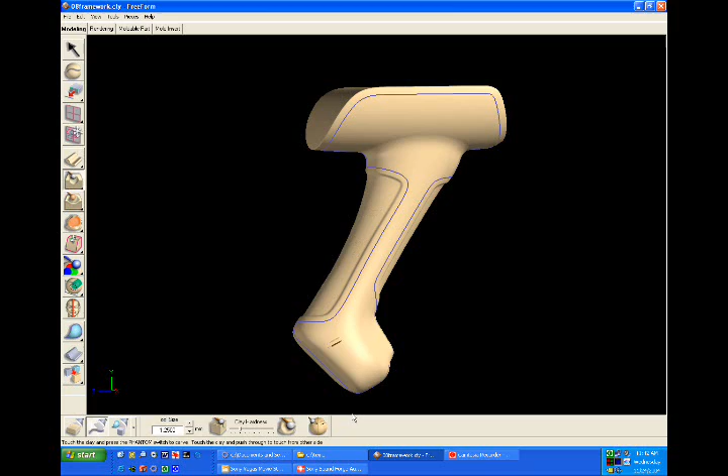Now once I've created my handle composite, in other words the blended handle into the converted clay area, I want to create this curve framework that's going to be the boundary for my patches or my surfaces that I'm going to lay over and fit to the clay. So you can see I've got an edge at the top, I've got boundaries down around these areas. These areas will become textured polygon areas. And then you can see there's a center line on the model that runs around the entire piece.

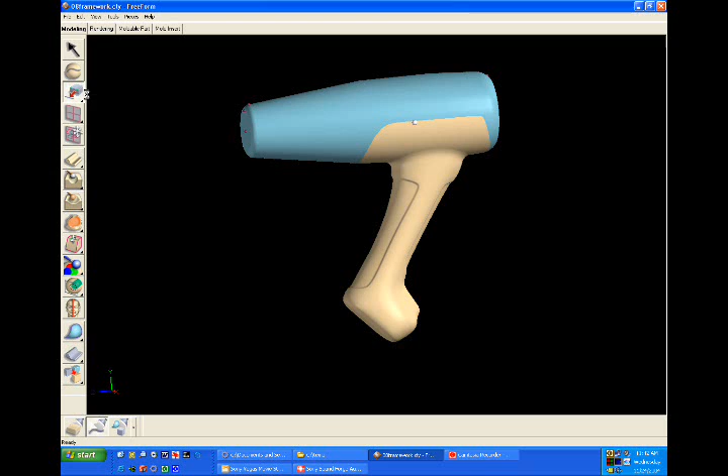So to be able to quickly create these, what I did is, let me delete these. I used my original sheet body, and I did copy edge. I just selected this edge here, copied it. That gave me that edge around there. I also used the intersection on the mirror plane to create the center line around the body, which gave me the center line.

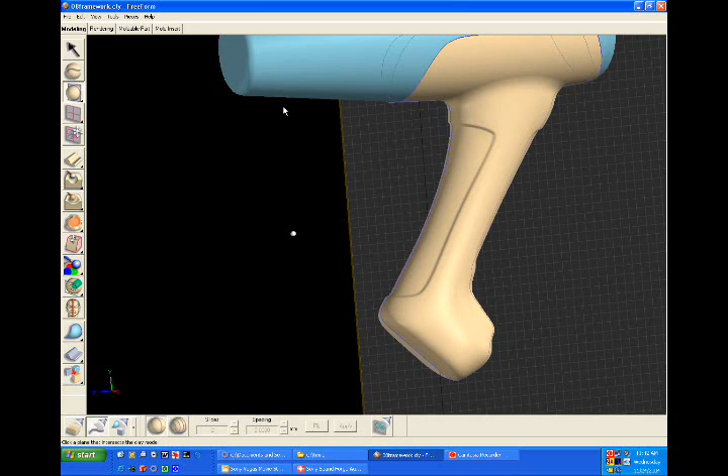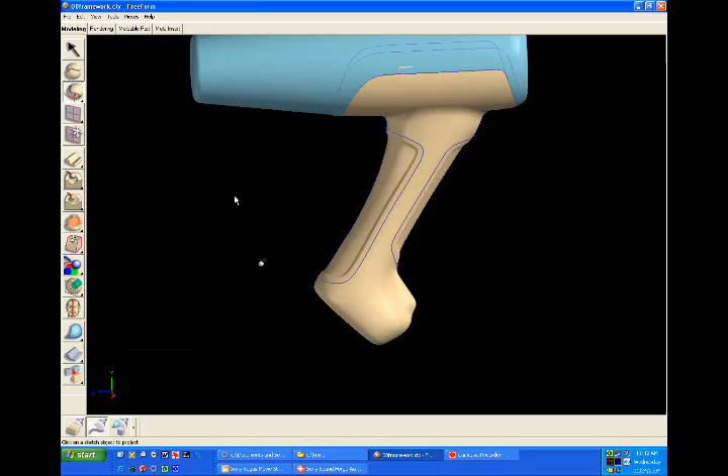And then for these handle cutouts, the areas on the handle, I used the same plane that I had used originally to do the actual cutouts. I went and got the curves, and using the sketch tools, I took the curves that I used to cut them out and offset them out as a way to create curves I could project on the surface to be the boundaries of the handles. So I laid my curves out like that, and then I cut and edited the curves together.

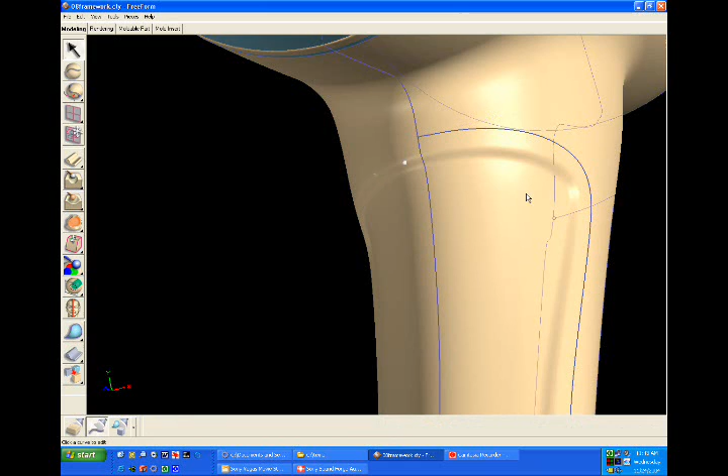I aligned this curve here, and this is important. I just touched that to the center line. Pick the tangent handle. Notice that we've added ways to align these tangents. I said align to the center line so I can make sure that my line lined up across like that. And then I also broke it there. I said disconnect this line at this. So I just broke the curve there.

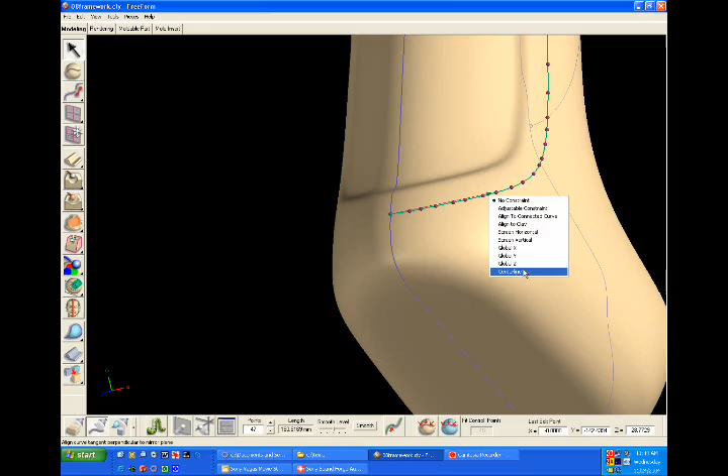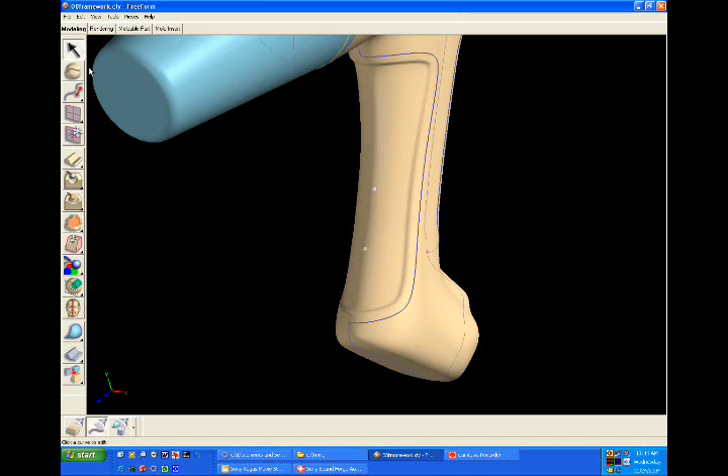I'll do the same thing at the bottom here. I'll line the bottom curve up as well. Again, take the curve, drag it so that it touches the curve, align its tangent, say align to the center line, so it goes directly across the center line. And then I broke the curve right on the T connection there. And then I deleted this inside curve here because I didn't need that anymore. So you can see I've just outlined the handle, and I've created a way that I can make a boundary for my patch that goes around the area that's going to become polygons.

The next thing I need to do is make the curves that are the boundaries for the patches that come down the handle. I want to have those fit to clay. The curves that go along the edge of the sheet body I do not want to fit to clay because I want them to align with the edge of the sheet body they were copied from. But these edges that go down around the areas that are going to become textured polygons, I want to have them fit to clay, and I want to have them more relaxed than when I project them on from the sketch plane.

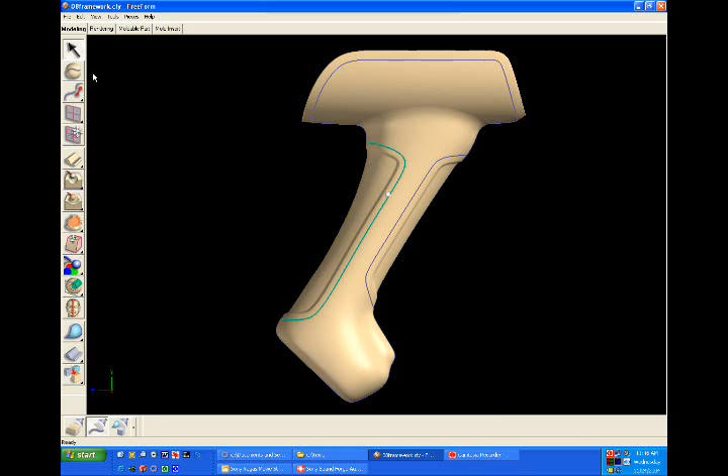Let me step back and show you what they're like when they're projected from the sketch plane. At the moment, after I've worked on them, they're fairly simple curves. They're fit with a certain number of control points. They've got a certain number of edit points. So these are the curves as they are just projected from the sketch plane. If I click on one of these, you can see it's got 47 points, and it's not fit to clay yet.

Now this is a particular workflow that gives you the best results. What you want is a curve that maintains the shape of the original curve, yet has less edit points and is fit to clay. My method is repeatable, works in a large amount of cases, and gives you a curve that's fit to clay with probably half the number of edit points, yet still retains the shape. So first I'm going to tell that curve to be fit to clay. I've got it set on 10 control points, but there's 47 edit points there, so it's going to try not to break the rule of having more fit points than edit points.

So when I click on this curve and say fit, while it was trying to do 10 fit points, it really did 42. It's going to try and do near the number of edit points, so it doesn't break the rule, since less fit points than edit points give you very strange results. Always have more fit points than edit points. It's how the software works. So now I've got 42 fit points. I can reduce my edit points down to 24.

And here I've got a curve that's a lot simpler. It's still fit to the same shape, but has many less edit points. It's going to have a lot lighter patches made with it. Remember, I have to use the same curve to build my patches off it. It's going to give me simpler patches off the edges of it, and it's going to be an easier curve to control.

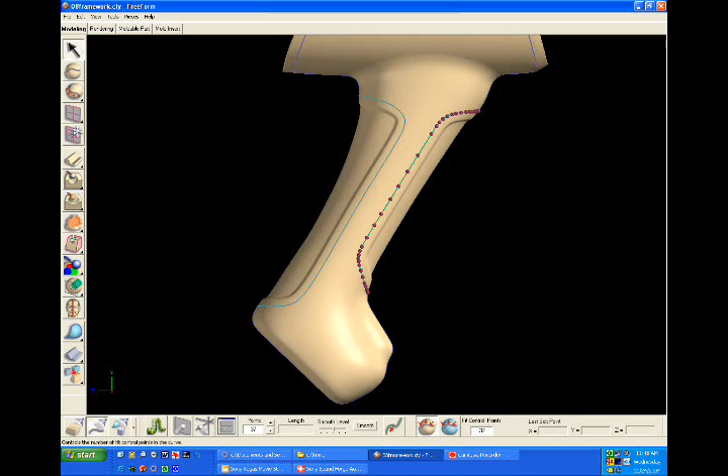I'll do the same thing with this. I fit that one to 10 points. Again, it's got 37 edit points, so it's going to try and do near that number of fit points. Now that I've fit it, I can turn my number of edit points down to probably half that, like 17. And again, I've got a lighter curve. It's still fit to clay. It's got less edit points. It's going to be less noisy. The patches built off of it will be simpler.